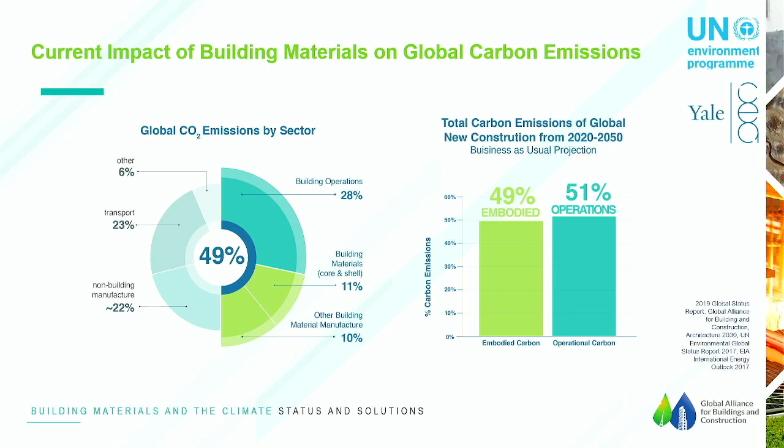So we're going to be looking at this from the standpoint of a whole building life cycle. But first, let's look at how and where we're using materials today.

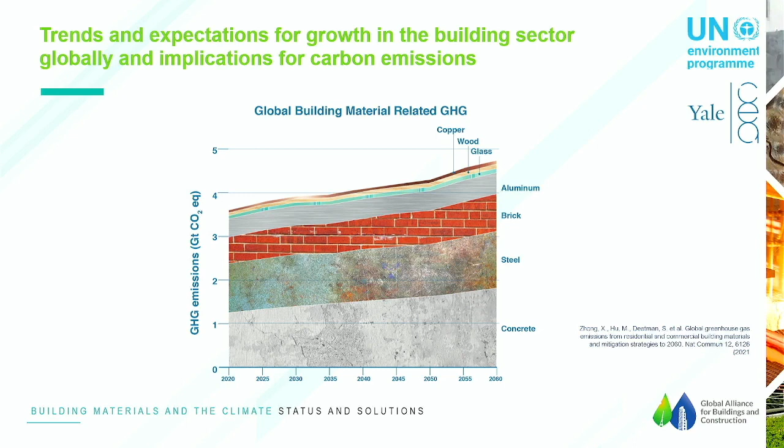Today, as we can see from this chart, the preponderance of our building materials are coming from extracted mineral-based materials: concrete, steel, brick, and aluminum. And they constitute the vast majority of the carbon footprint of the global building sector as a whole.

However, as we can see here in 2015, it's tempting to think that this is how we always have to build and how we always have built. But if we look at this chart from 1945, this is post-World War II, we can see that the preponderance of our global material flows were actually bio-based.

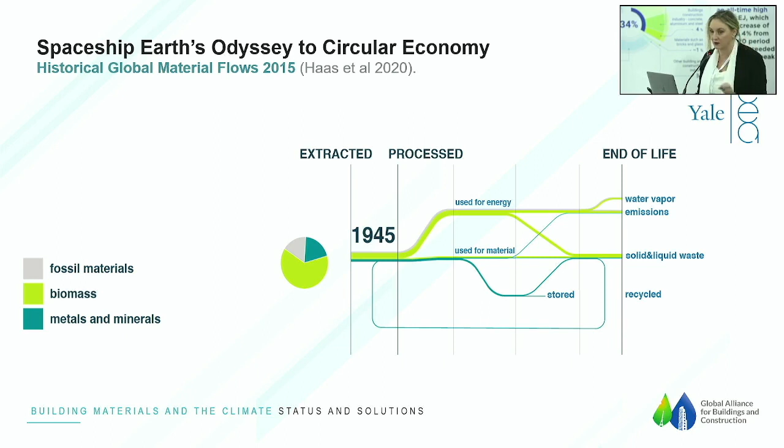We had a small fraction. We managed to build very large global cities with bio-based and earth-based material processes.

And we're not advocating necessarily a back to the future. We're not saying let's go back to the way we built 100 years ago, because we know that with global population and market pressures, we need advanced materials and we need scientific-based advanced processes.

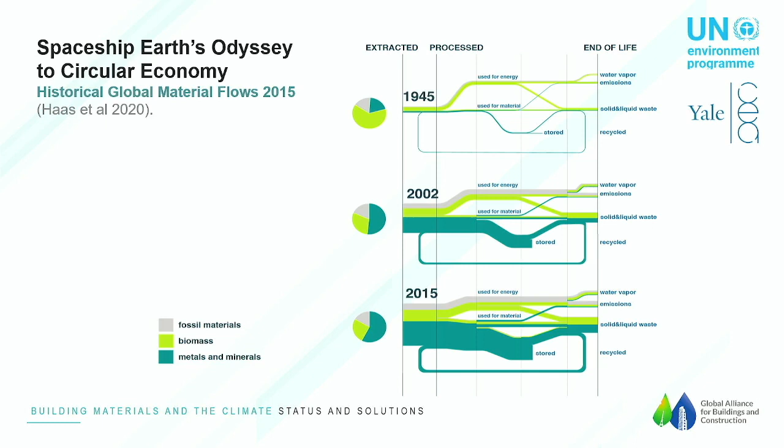However, we must combine this with going back to the fact that we need to tailor our materials if we're going to get to so-called on-site net zero energy, or net zero energy and water, because we always have to look at the energy-water nexus in our material production, extraction, and maintenance. Then we really do need to start to look at a tailored, on-site, local solution to our buildings.

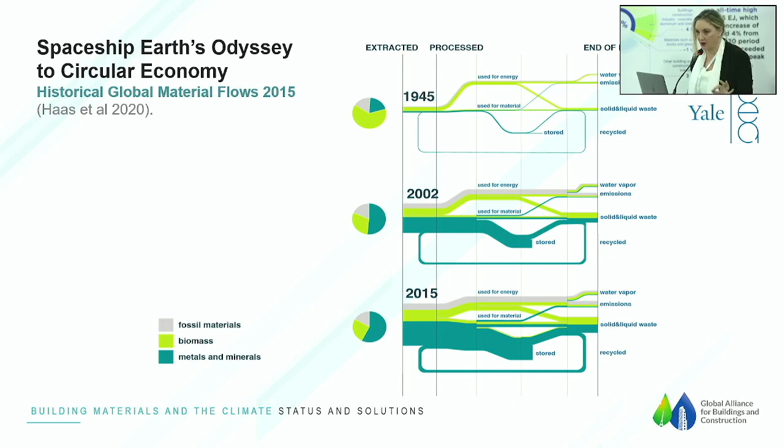And we do need to start to shift back towards bio-based and biocompatible processes as much as we can, while maintaining the health of regional and global ecosystems and forests and agricultural lands.

So just looking at what we do with energy and the carbon footprint: if we are largely a fossil-based energy economy, which unfortunately we still are, but we are going to shift towards renewables, we look at the embodied carbon of materials, and we look at operational carbon emissions.

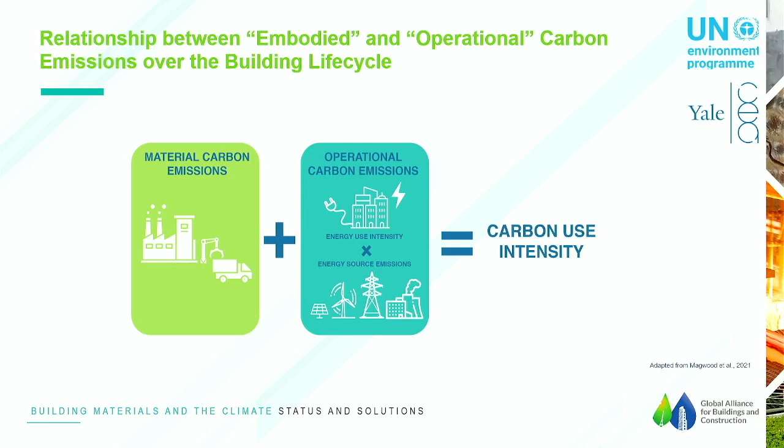This is really the material carbon emissions will have, as we said, all of the process-based emissions. And then ultimately, it leads towards what we call a carbon use intensity, which we can measure in our buildings over time and over the course of a life cycle.

This is a chart to illustrate what Jonathan was talking about, which is that as we start to decarbonize our grid over time, as we get better numbers in terms of the way that we are operating, and as we get better practices for operational energy, that is, we're going to decarbonize as much as we can our heating, cooling, lighting, and plug load systems. We can see here that in the light green, the embodied carbon of materials starts to take on greater and greater significance proportionally to the building life cycle over time.

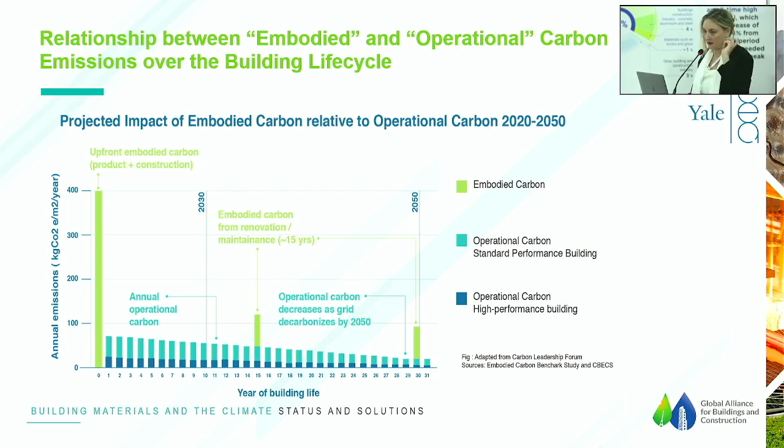This chart shows in the light blue operational carbon with a standard performance building, but in the dark blue we can see that we are largely starting to decarbonize. As our prior speakers have said, we have some good news on the operational front. But let's take a look at materials.

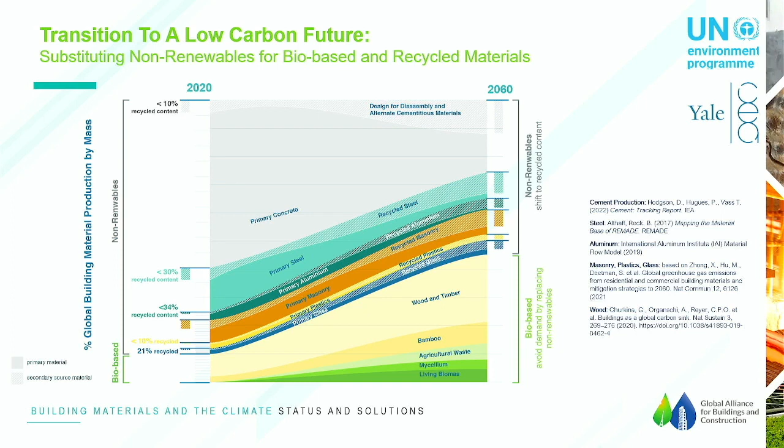Today it's very small, but if we were to sustainably manage wood, timber, bamboo, agricultural waste, mycelium, and living biomass, they should, by 2060, really rise to be about half of our material sector. Then the preponderance of our non-renewable sectors need to start to participate in what we would call a circular material economy. That means that we need to try as hard as we can throughout the life cycle to design out the waste, meaning we're going to design for reuse of materials, and then if we cannot reuse, we will recycle.

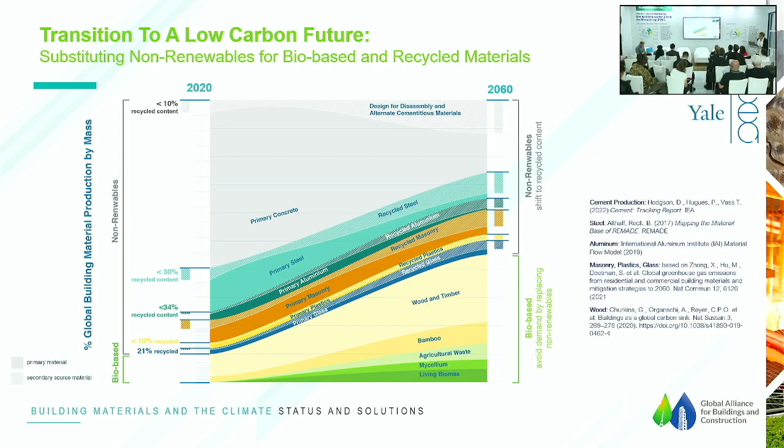Of course, as we can see on this chart, we're still going to be using a lot of materials, a lot of primary-based materials in 2060. We're still going to be producing, so we have to figure out how to decarbonize the production and the extraction of materials. Now, how do we do that?

We're looking at really exemplifying within the built environment sector exactly what the Secretary General told us at the beginning of this conference, that if we do not cooperate, we will not reach our goals. Nothing could be more true about that statement than the built environment sector, where we must look at the production, construction, use, and end of life, or we would say end of use, because we don't want to take them out of their life cycle.

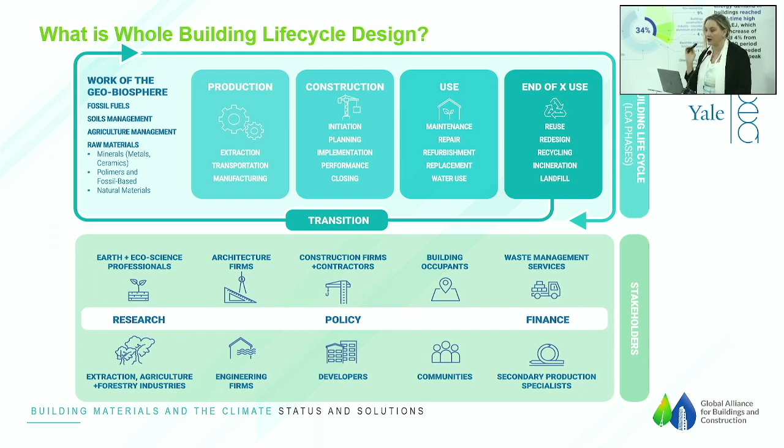And through research, policy, and finance, we must simultaneously incentivize the stakeholders across that life cycle to cooperate and to be equally responsible. We need a level playing field. We have to close the carbon loophole in the built environment sector. We cannot penalize countries that are producing and under a tremendous amount of pressure to produce at a very, very low cost. We must be shouldering the responsibility.

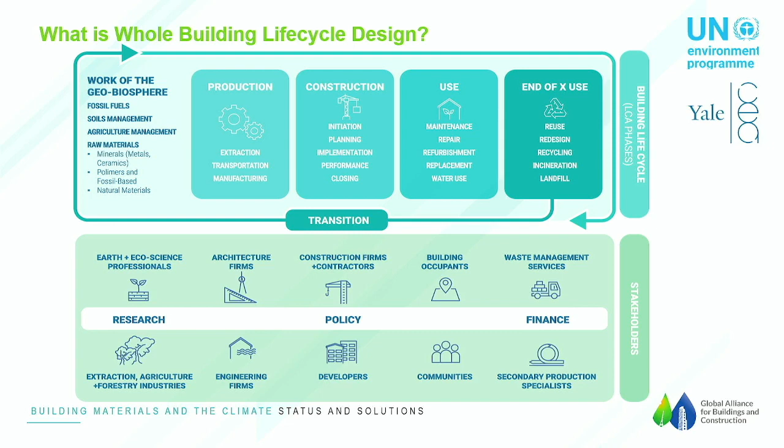So, as Jonathan said, we are looking at a framework to look at avoiding, shifting, improving, and adapting the built environment sector for materials. And when we say avoid, we're saying design better with less. We're not saying do without. This is a very, very important distinction.

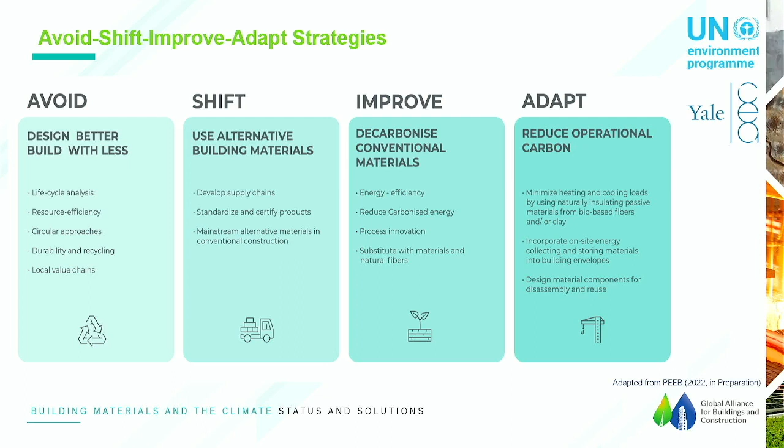A lot of people hear build less or build with less, but we're not actually saying that, because I don't think that it's in any way viable or fair to emerging economies to say you should stop building after many advanced economies have built up. What we're saying is build better, decarbonize, and then the global south and emerging economies will show the rest of the world the way, and they can leapfrog in many sectors, as we'll see in a minute.

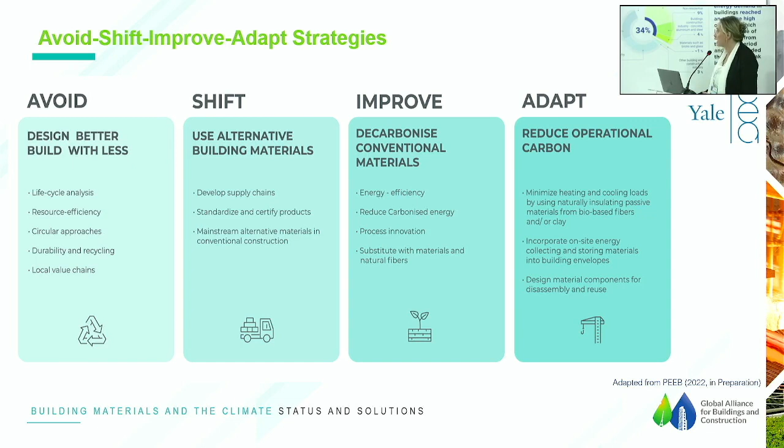We're going to shift to the use of alternative materials. We have to improve our decarbonization of conventional materials, and of course, adapt to reduce operational carbon in general. One of the most important aspects of our report that we're going to focus on is it's very difficult, actually, to transition from a linear to a circular material economy in construction. There's a lot of lip service that's given to it, but it is not an easy thing.

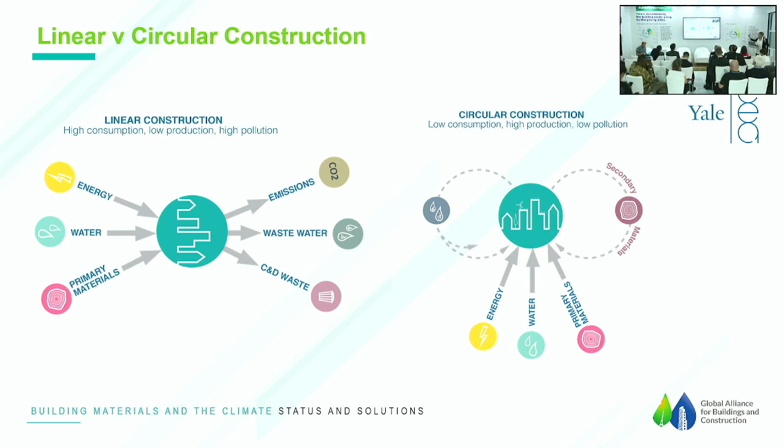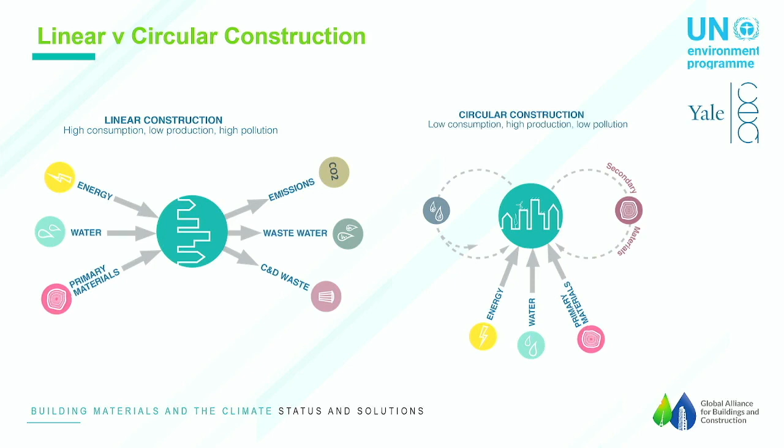That's why we need the cooperation. We need to basically look at how energy, water, and primary materials will, instead of being the primary producers in the built environment sector, because it's by far the largest sector towards emissions, wastewater, and construction waste, we're looking at keeping those secondary materials in the system, and also even with on-site zero and district zero sustainable means, keeping energy and water into the system through renewable means.

One important thing that I also think we need to focus on here is that the more we build, the more materials we have in the built environment sector. So we have a lot of those materials, especially in the global north and in evolved economies that have really a lot of mid-20th century failing structures that they could be recuperating and reusing. We can start thinking about materials, buildings not for demolition and landfill, but as material banks.

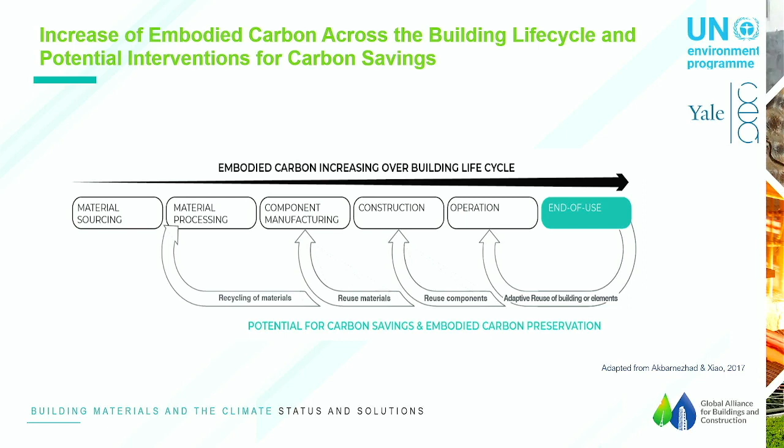But one very important thing about that is, at end of use, we need to very much prioritize the adaptive reuse of buildings themselves. That means all of our first choices are on the right-hand side of this graph, meaning that we want to reuse our buildings. If we can't reuse our buildings, we'll reuse the components. If we cannot reuse the components, then we will reuse the materials, and as a last resort, we will recycle. So recycling is a buzz term, but that would be our last resort in a circular material economy.

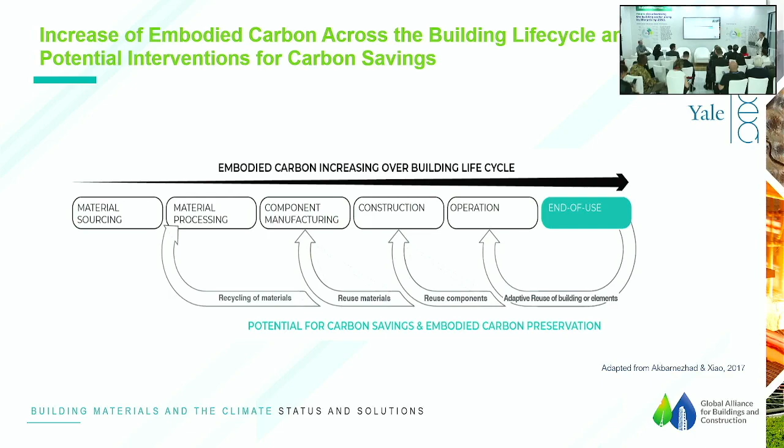Why? Because it's very chemically and energetically expensive. So we don't necessarily want to do that. We want to keep things in place if we can. How do we keep things in place? All the way back to the design phase. We have to design for disassembly and reassembly and reuse as much as possible. So a quick snapshot, and then I'll pass the baton to my colleagues.

In the different sectors, cement is by far the contributor towards the carbon footprint of the concrete and cement sector. But as we know, concrete is extremely valuable to us. It's durable. It gives a great amount of structure for the price point, and it's not going away. So we need to reinvent cement, and it can be reinvented through a number of different strategies. We have to avoid the material overuse by optimizing design. That means digitalizing the process as much as possible through computer-aided processes.

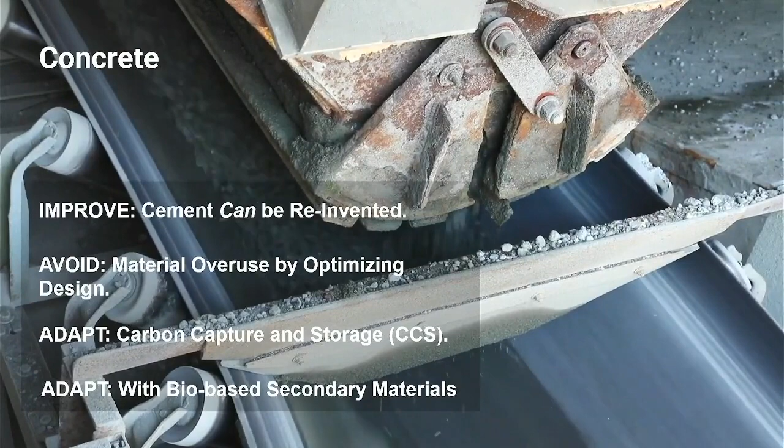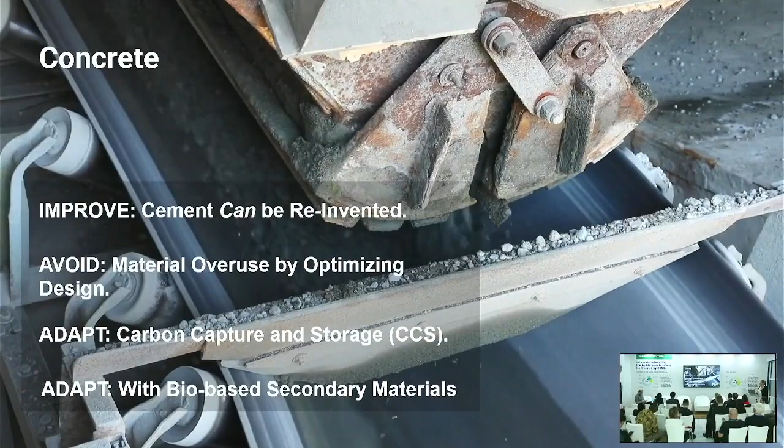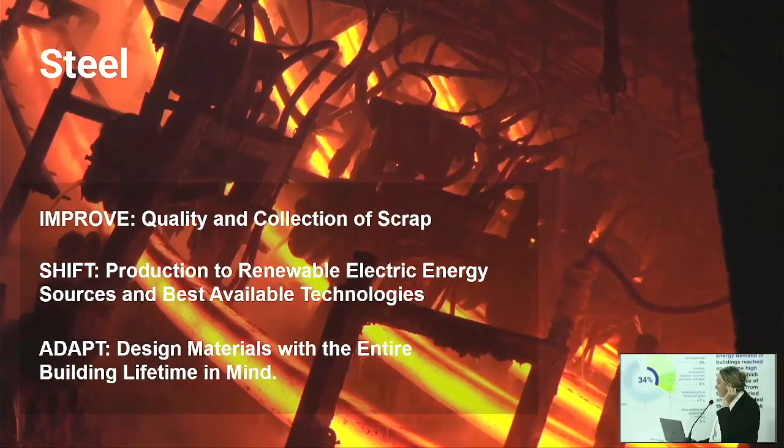We'll adapt carbon capture and storage at plant, but also potentially inserting that carbon back into the production of concrete itself in order to increase the strength of concrete. And of course, as I said, we want to adapt with as much bio-based content and secondary materials as possible. Steel is the next largest carbon emitter in the built environment. And with steel, really we need to improve the quality and collection of scrap, because steel can be very nicely recycled, or components reused.

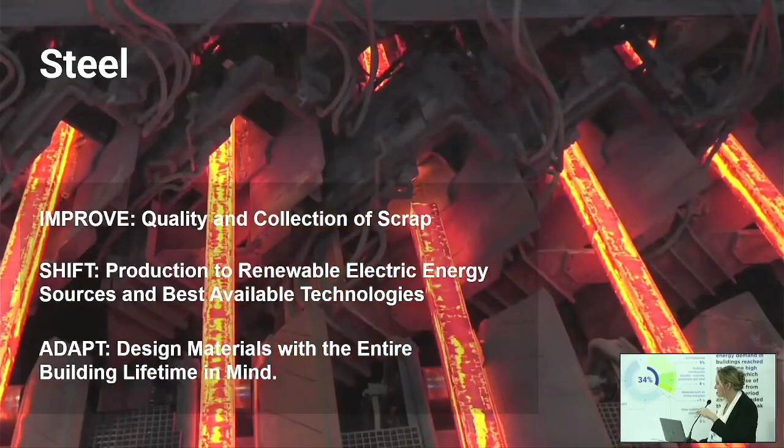This building we're in right now is a good example of lots of recycled or reused aluminum and steel, that we can design for disassembly and reassembly very quickly in all of our buildings. We need to shift the production to renewable electric energy. That means we need to electrify the process and use best available technologies. We need to adapt the design of materials with the entire building life cycle in mind.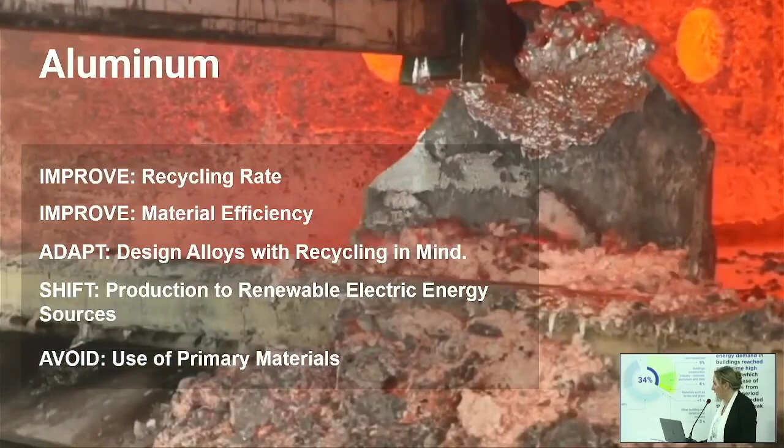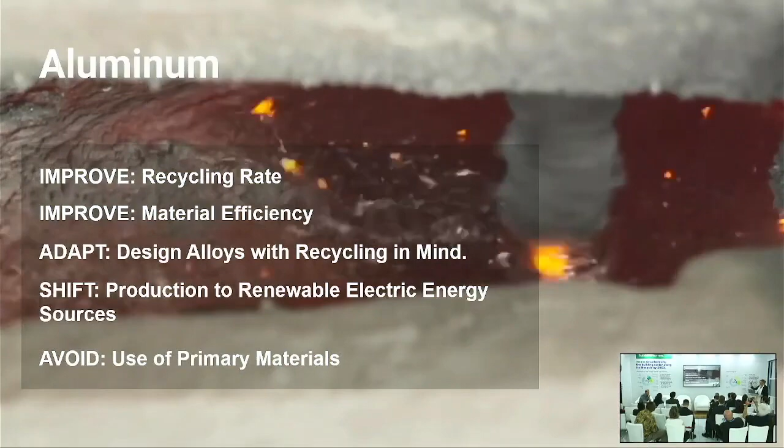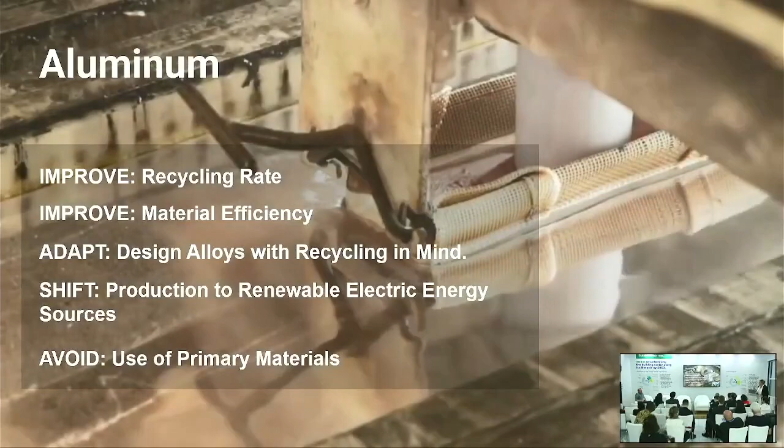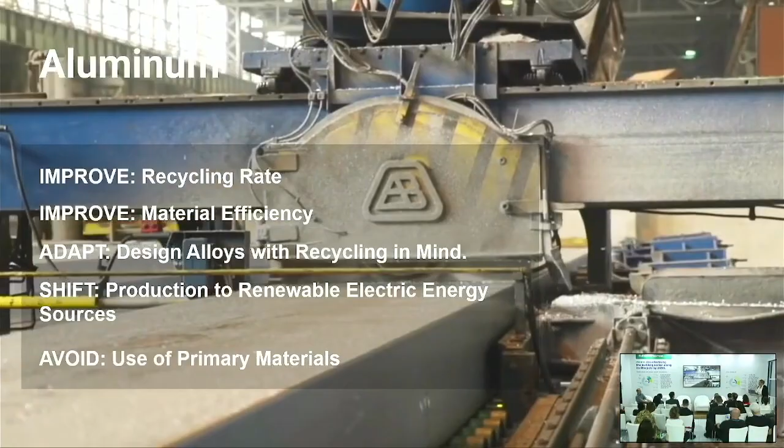Aluminum is a growing area. We're increasingly replacing steel with aluminum on building curtain walls and facades. We need to dramatically improve the recycling rate per the initial chart that still shows only a fraction of recycled aluminum, because we need to adapt the design of aluminum alloys with recycling in mind. And we really need to shift production again to renewable electric energy sources. All of these materials, concrete, steel, and aluminum, really depend on a clean grid mix. We will not decarbonize without the grid.

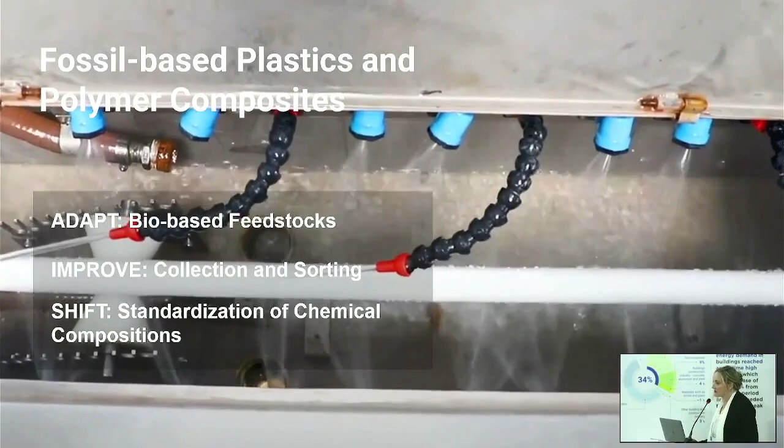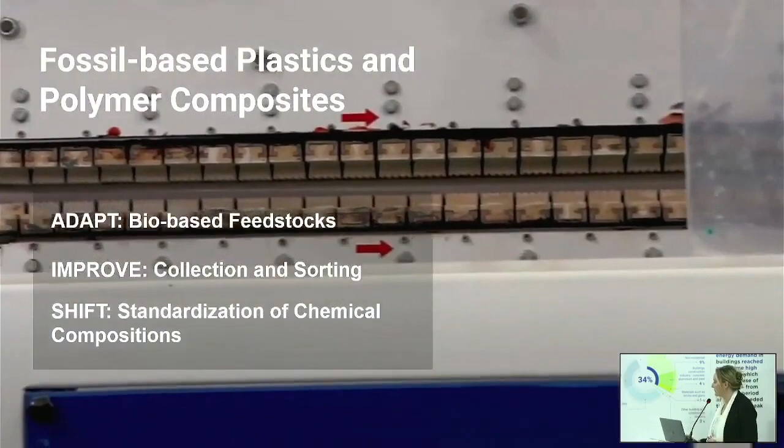In fossil-based plastics and polymer composites, this is also a dramatically growing area. We can see it all around us. There's probably not one single surface in this building right now that doesn't have a plastic surface on it, and we can smell it. So this is a big issue for health and well-being. We need to dramatically reduce and shift the off-gassing of emissions in the production of plastics and also in the implementation. I feel obligated to say that as we sit here. We might have a few headaches in the room by the end of the day.

But we also need to adapt towards greater and greater bio-based feedstocks. We're not quite there. We need to improve collection and sorting, but with bio-based plastics, like with all the material sectors, we really need to improve the research and development towards the circular adoption of aquaculture waste and also agricultural waste towards bioplastics.

So we can partner with the agricultural industries in this way. Glass is a very, very important material for the future. It definitely gets a hugely bad rap, a deserved bad rap around the world, because we've replaced, in many areas, commercial building stock from sustainable, local, earthen and biomaterials towards a lot of glass and steel on the facade. So glass has, in many areas, especially in those cooling degree climates like the one we're in here in Egypt, dramatically driven up the cooling requirements and loads of buildings.

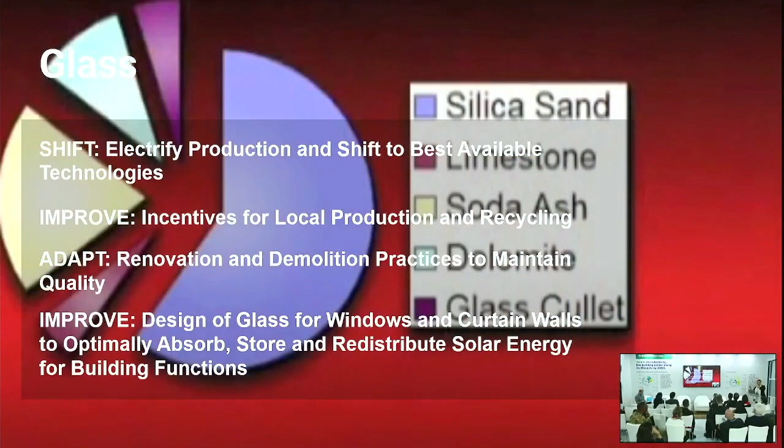However, and this is a big however, glass is very important towards future on-site net zero, because it may be the material that we need in order to maximally absorb, capture, store, and redistribute solar energy for internal building loads. So we need glass, but we need to adapt glass not to reflect energy and waste the energy, but to take it into the system.

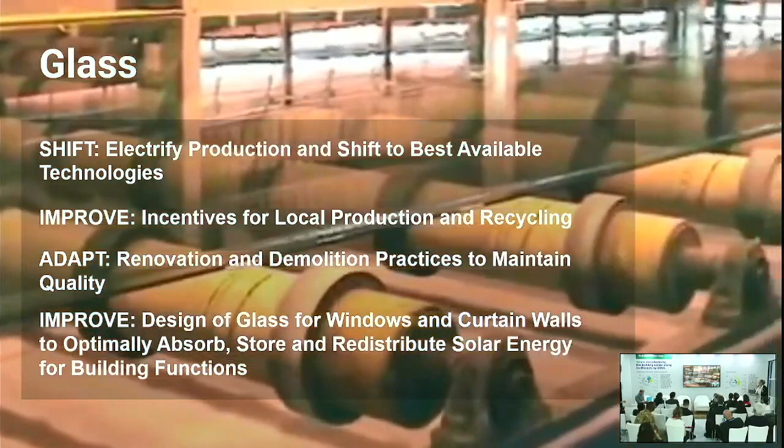So we need to very much shift towards the electrification and shifting to best available technologies, improve incentives for local production and recycling. Very important in glass. We can recycle. It's one of the best materials for recycling. But we also need to adapt renovation and demolition practices to maintain the quality. It's fragile. Easily, curtain wall systems and glass systems can be destroyed in that process, and we need to design with demolition in mind so that it can be reused.

And finally, oh my goodness, sorry. Oh, my. Okay.

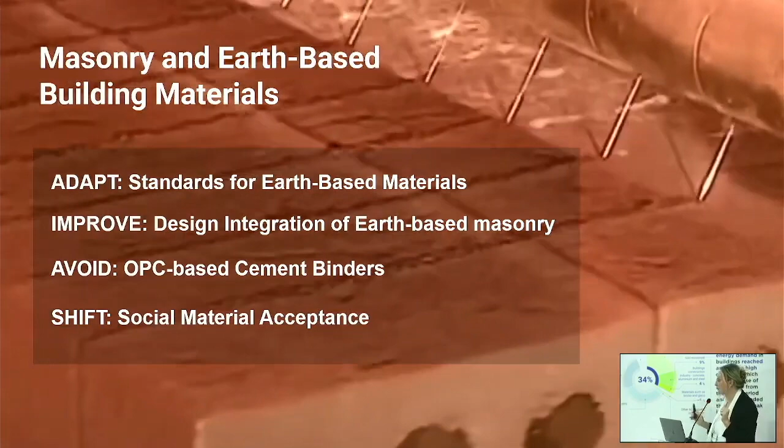Finally, we need to ramp back up. This is the back to the future moment. We need to go back also to abundant earth materials like masonry and earth-based. We need to adapt standards for earth-based materials. In Africa, we have some of the most beautiful global heritage architecture that is earth-based. And we must learn from the past to go back to these very sustainable methods where they are biodegradable and they can be a great part of the circular material economy.

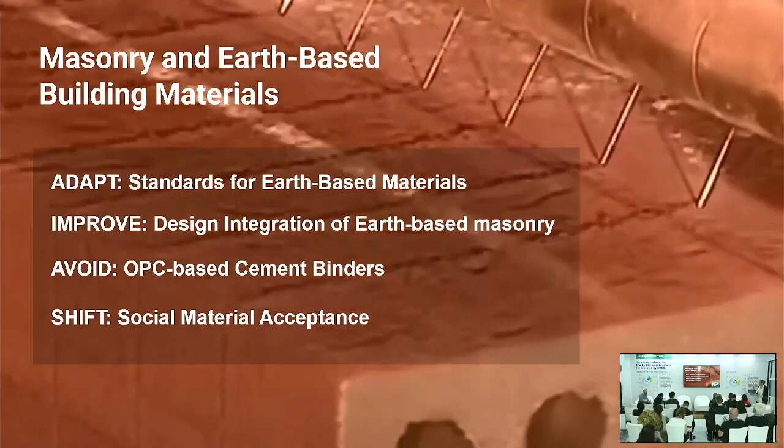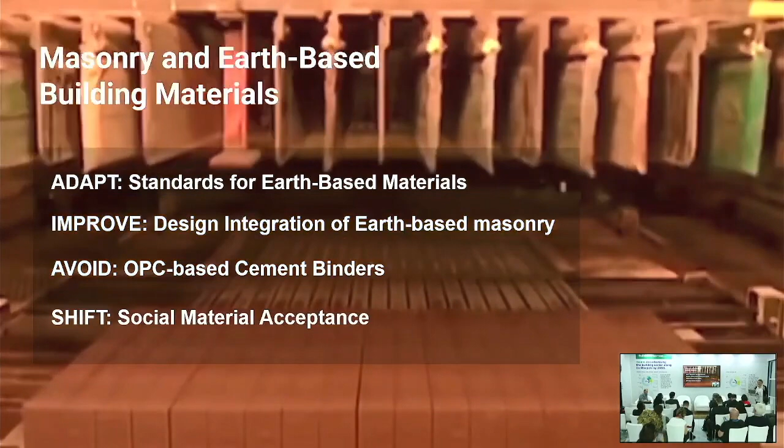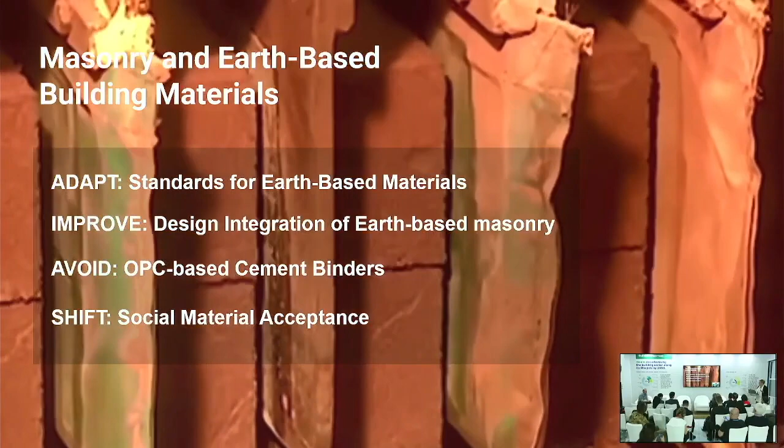We also need to shift social material acceptance. Sadly, there's a premium on so-called modern buildings around the globe to show that we're modern. And so a lot of times in regional economies that have a wonderful tradition of earthen-based materials, it gets rejected because it's not the image that a lot of companies or buildings want to project. So that is a challenge that we have.

It's also a challenge with timber and wood. We need to shift the social acceptance towards understanding that this is a material that can last a very long time. Actually, where we're from at Yale, the preponderance of the building stock is in wood, and it's lasted for 4 or 5 centuries. We have many old houses that are already more than 400 years old, but they're maintained over time, so they stay in place.

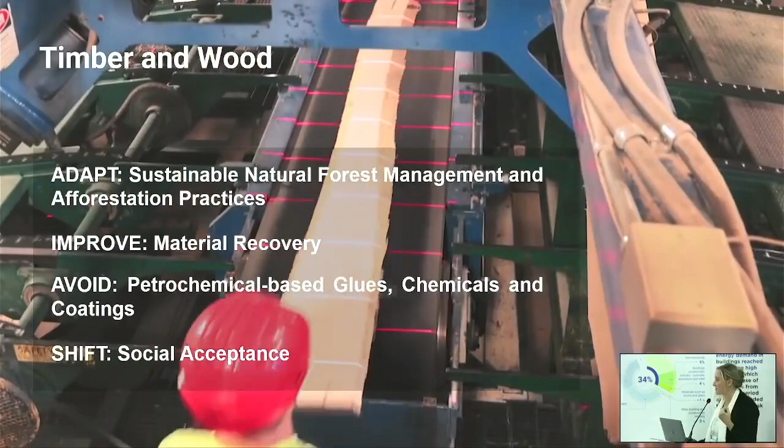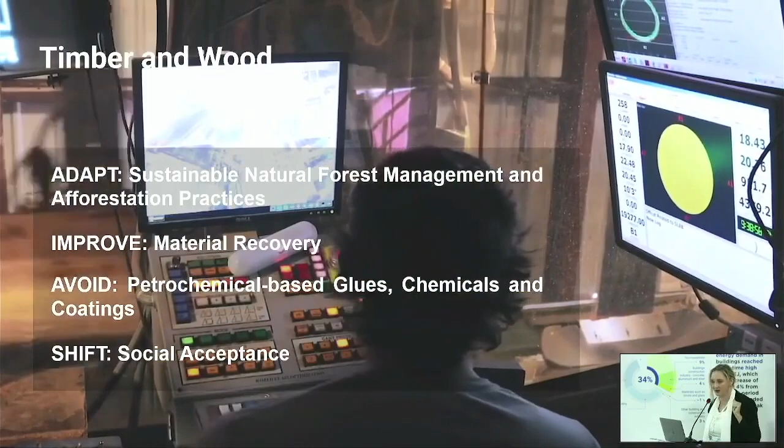We have to improve the material recovery of timber-based, and, per what we're smelling today again, we need to avoid petrochemical-based glues, chemicals, and coatings that are terrible for health and well-being, terrible for the ecosystem, and also reduce the circularity of these systems, our ability to recycle them into new material economies.

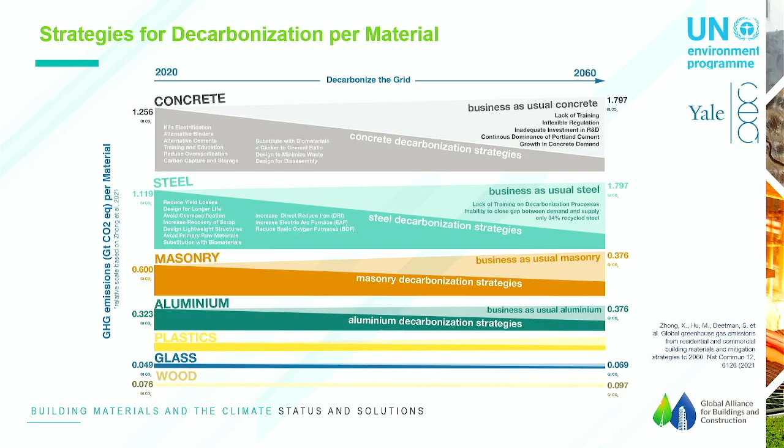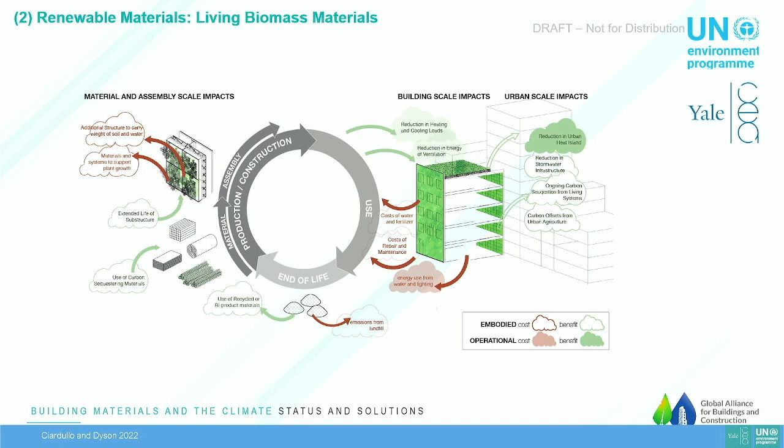And I know that I'm out of time. And lastly, I just want to emphasize that we need to also go back to designing through nature-based processes. We need to start thinking about biomass materials as a material. That means living systems are materials that we will design our cities with and we will cover surfaces with.

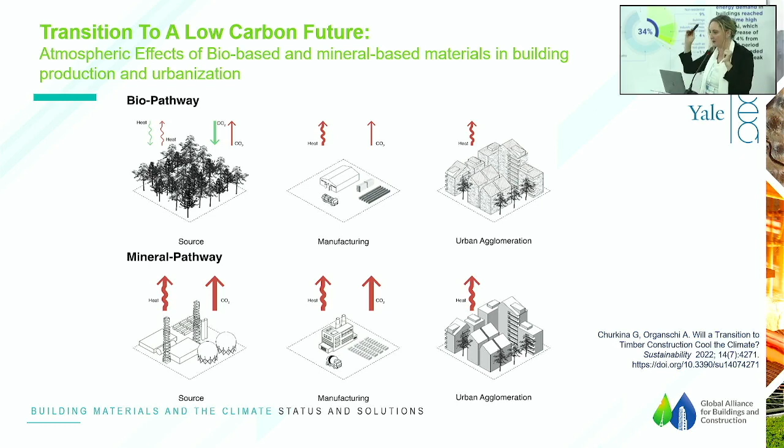And we will be part, once again, of the bio-based pathway as opposed to the mineral-based pathway, which, as we see, is only part of our recent history. Only in the last 100 years did we start really ramping up on mineral-based processes. The preponderance of human history and civilization has been compatible with bio-based processes. Thank you.

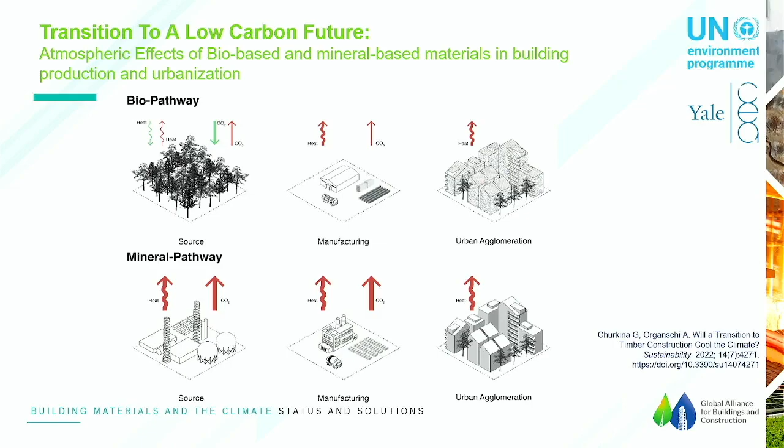Well, thank you very much. I have the feeling I am stepping out of a master's at the Yale Center for Ecosystems in Architecture. Thank you so much, Anna, for what you do. Thank you for distilling so much work, and congratulations to the professors who are probably watching us online and who also contributed to this study, which is really an in-depth X-ray of the current situation of how we build our buildings and what we must change.